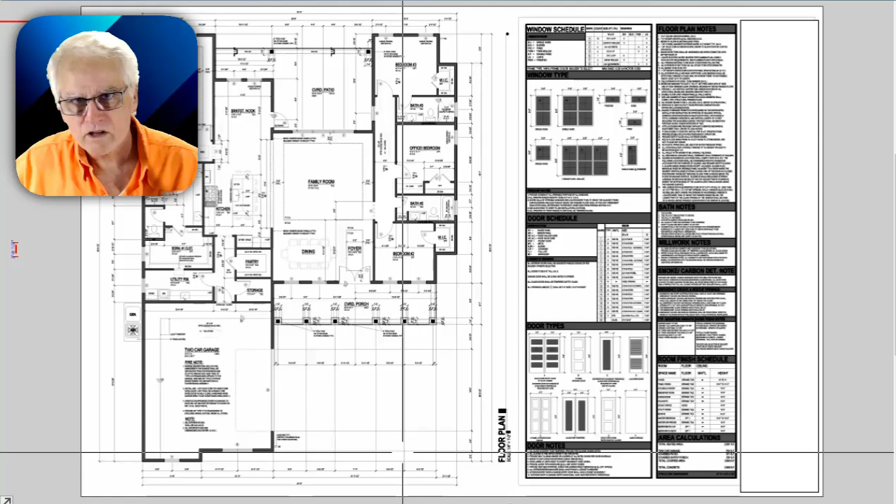So what we're looking at is a nice floor plan. It's got several bedrooms. It has all the components you would expect, a garage, a number of bathrooms, a porch, and that kind of thing. But let's take a look at the front so you can get a sense. It is a single-story home, some very specific elements. And you'll see a lot of notations drawn on this plan. Like I said, it's a graphical specification.

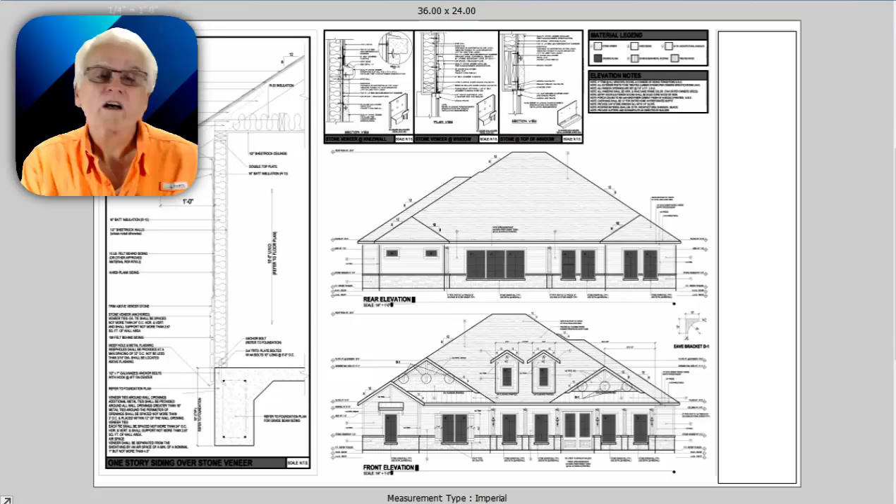It's almost like a builder, if they're really doing a great job, they have a written specification or scope of work or both that they're going to sign you up with under contract to build this home. Well, let's zoom in and I'll talk about some of the graphical specification elements. And as the buyer is expecting the builder to pick up on these details, the builder is actually responsible for building according to these details unless they have some documentation as to why they're not going to, usually done ahead of time.

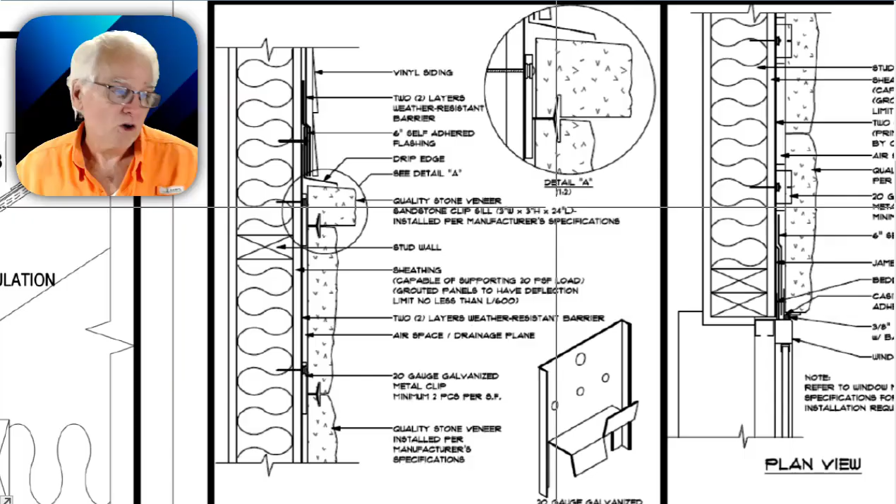So these are some of the architectural understandings that are being passed along through the plans to the builder, to the tradesmen that are working on this house, as well as to an inspector that is going to look at it. Now, bear in mind that inspectors are really focused on code more than they're focused on the structure. Now, the structural engineer, he's also focused on code, but he doesn't really concern himself with design because, after all, his is a profession, so is the architect.

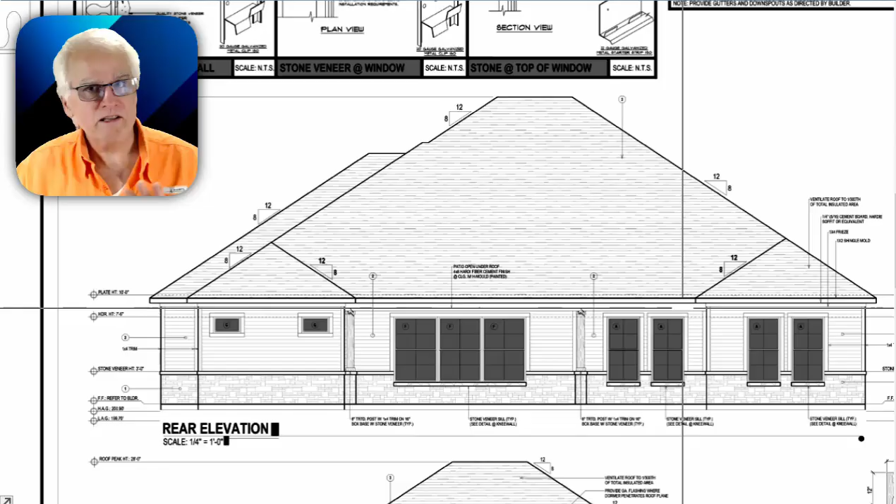A profession, and they don't really try to do each other's work. But what I do see from time to time is a plan that will say one thing and an engineer that will say another. So I've got an illustration for you on this very plan where that has happened.

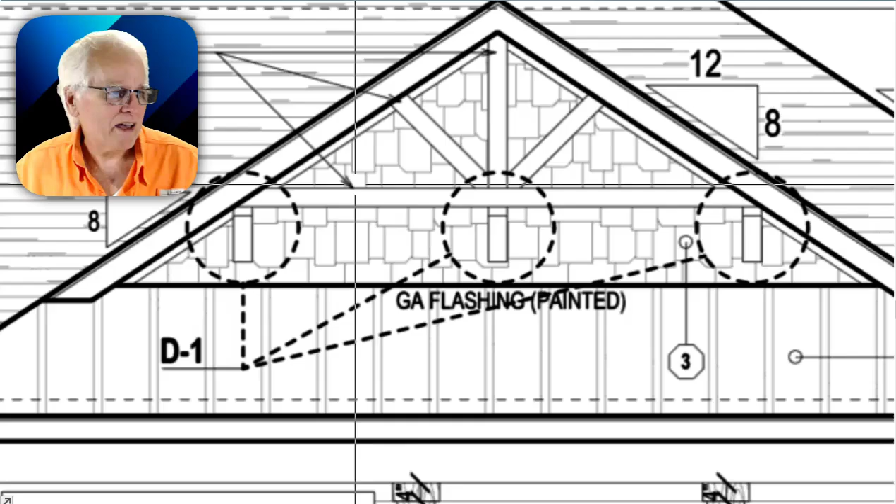Now, first let me show you some of the graphical elements that are being designed, but not by an engineer, but by the architect. That is, we see this gable here, and it's got some staggered shake shingle siding, and it's got a gable truss that's built on site. Once again, these are decorative items. They're just design items. But look at this design item.

This is called a typical wall section. It's not engineered. It's just a typical wall section. This is the architect telling the builder, if I were you, I'd build it like this. It may or may not be designed according to code.

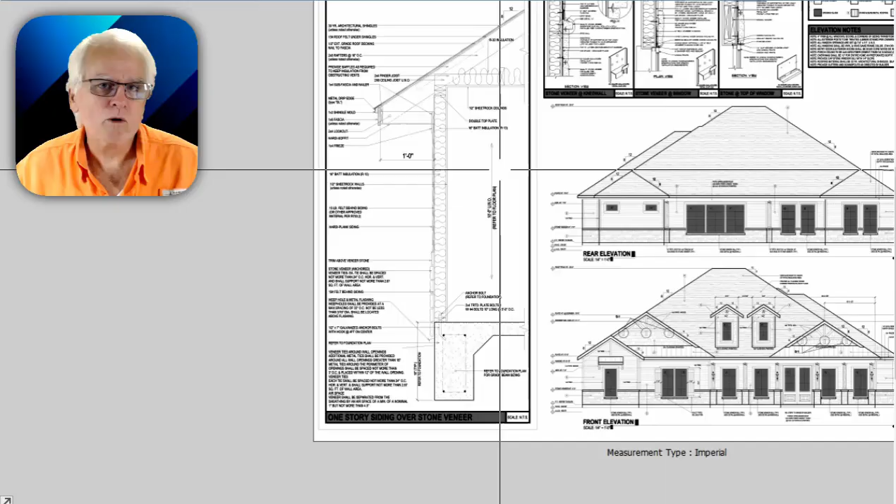This design might be required by a given municipality, especially if this has to be a firewall, like if a house is going to be right next to another house within 5 feet, typically. In some areas, it's 3 feet. But, where you have to have a firewall, and whether that's going to be like vented soffit.

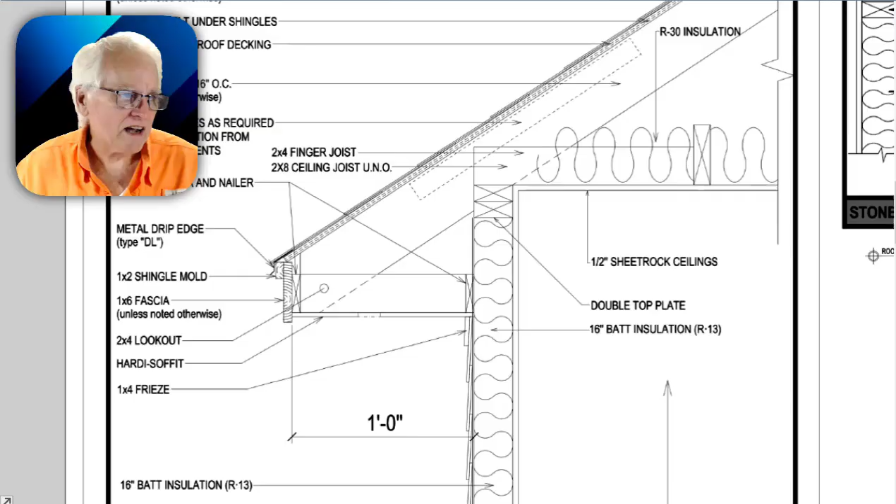In this case, they are actually showing we've got some rafters drawn in, we've got ceiling joists, these squiggly lines here, that indicates insulation. And this is the ceiling for the overhang called soffit. You see the hole there. That is venting for the soffit. There's a whole system to this where the air can go through the venting and ventilate through the roof, through ridge vents. But it's not engineered.

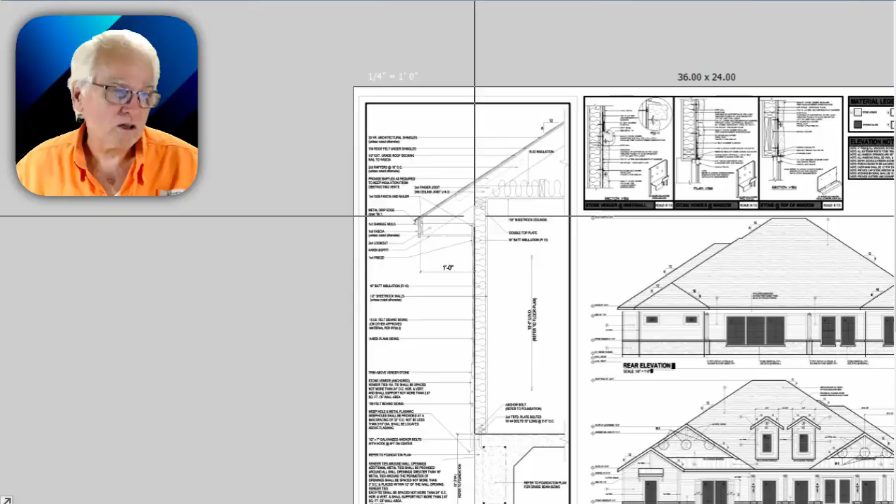It looks pretty. It looks like a wall, but as far as engineering is concerned, it's just a picture. But here the designer is saying you're going to have some half-inch sheetrock, some batt insulation, and so forth. But once again, it's not engineered. So how can I prove it's not engineered? Well, let's start at the foundation.

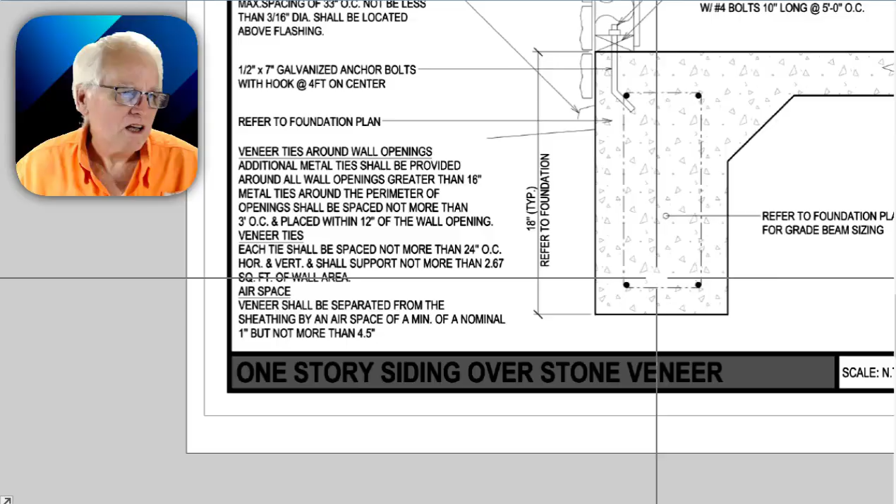This designer is telling somebody that, now this is the foundation beam. Now, the beams in our area with a monolithic slab are a component of the slab. In other areas of the world, you might see this as a footer, maybe a 24-inch wide by 12-inch deep footer with some rebar in it, with the slab then poured later on top of that. That's not how we do it in our area. This is called a monolithic slab.

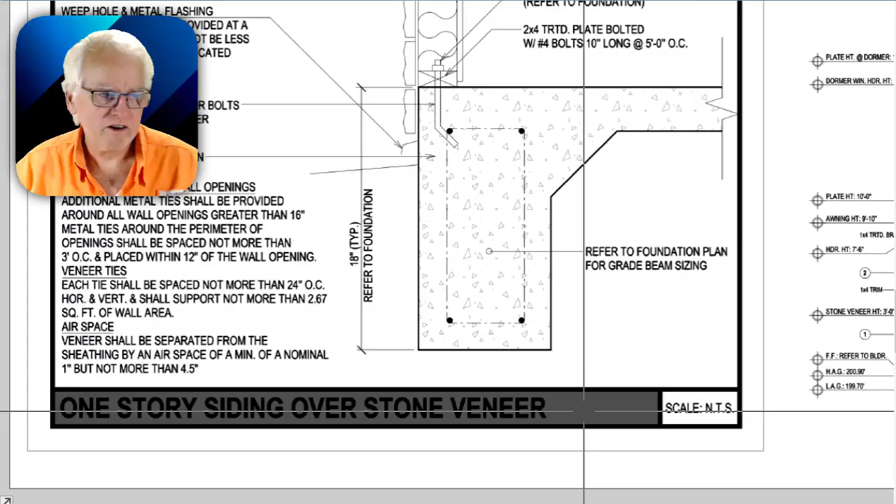In this design, there are these 4 dots here. Those represent rebars. These dashed lines between them indicate stirrups. They're going to turn these rebars into a cage, but they only show 4. I want you to key on that. And they also say that the depth of this beam is 18 inches typical. But what they don't give us is the width of this beam.

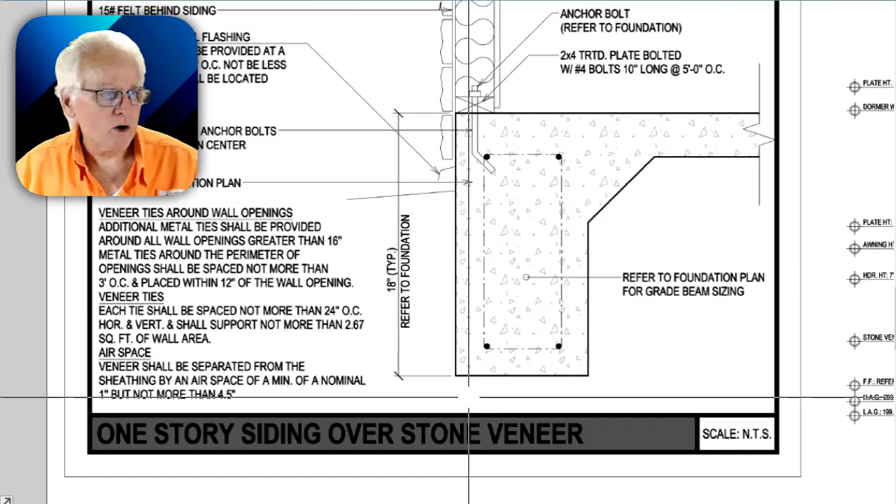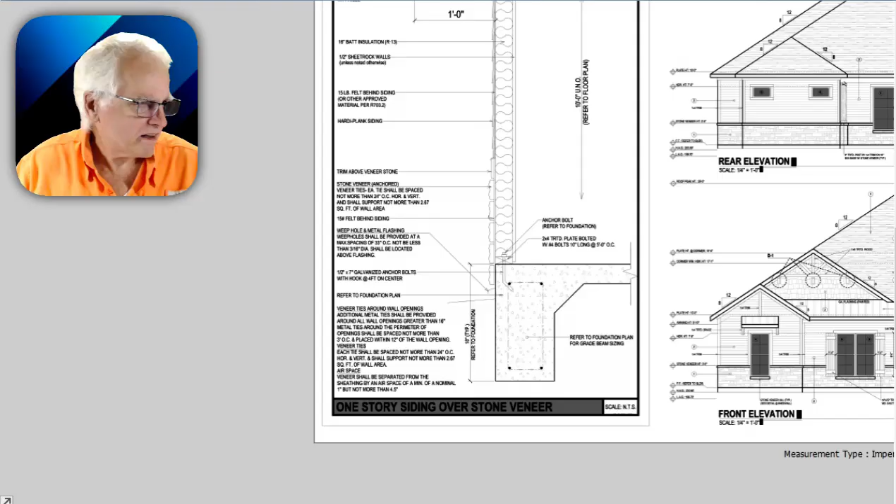So this will vary according to some things like something we call a soil test. It's called a geotechnical engineering survey, and it is a crew that comes out with a special truck that drills what we call cylinders, or about 8-inch holes, and they grab the dirt, usually 3 of them on a job site that's a regular lot, and they take those to a lab and they see what's in that soil. Then the engineer takes that data and they draw this. And this is your foundation.

So now what we've gone from is the structure. I'll go to the floor plan. Remember, that's the floor plan, but now we have the foundation. It mirrors the floor plan in a different way.

Now, when we're talking about beams, we're talking about the structural concrete in our case, the foundation elements that are trying to transfer the loads that originate at the ridge beam of the house, and they transfer from the ridge through the rafters to the walls, to the foundation, to the soil. So we're trying to transfer loads to the soil without disrupting the soil or displacing it, because if that were the case, then the foundation would fail. That would be a problem.

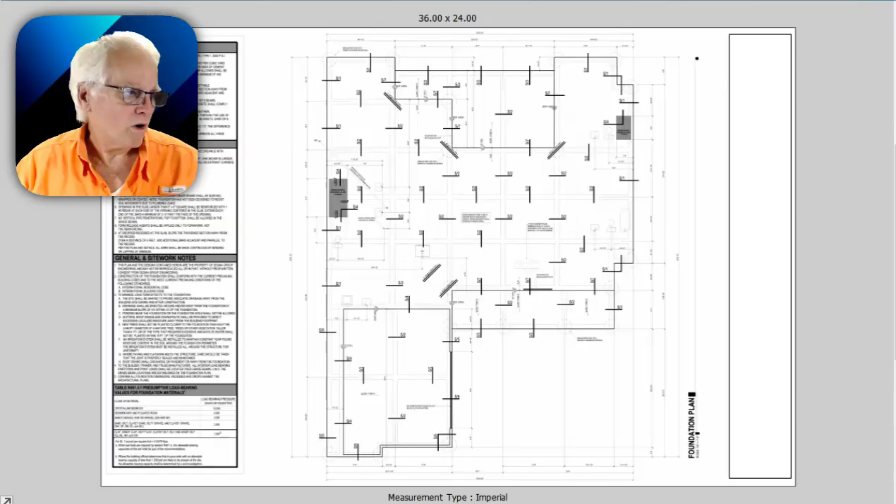So when I'm showing you this, there are some details I'm going to show you in a moment that will help you understand what's going to go where. For the moment, let's kind of look at some areas. This is the garage area. And you'll see some notations, S5, S4, S2, S6.

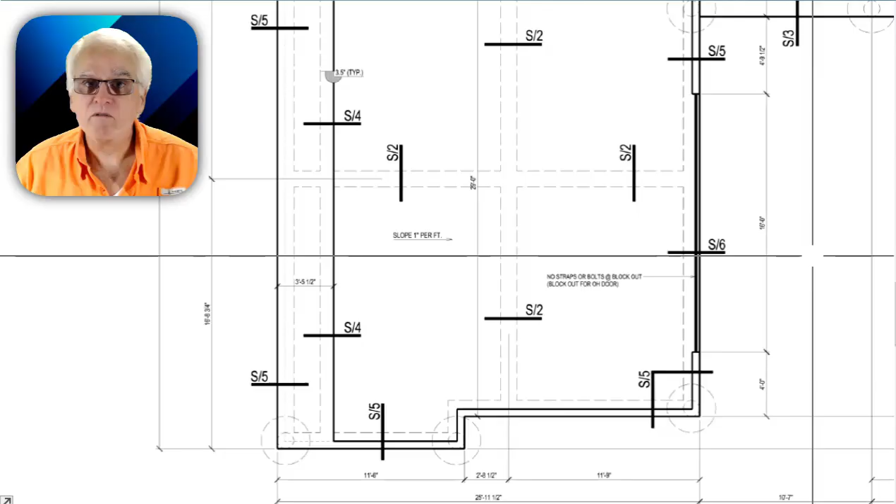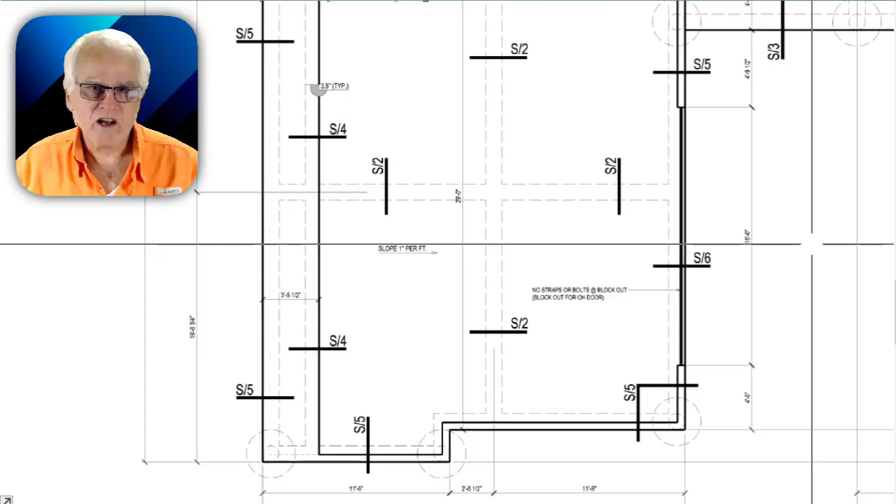Each of these designations is telling the builder and his tradespeople what type of beam to put here. I'm going to show you the picture of what it looks like, but basically it's the width, the depth of the concrete. It's how many rebar or what type of structural support it's going to have. This is a rebar slab, but we also could do a cable slab. We see production builders using something called tendons, also known as a cable slab. Totally different methodology, although the design would look very similar.

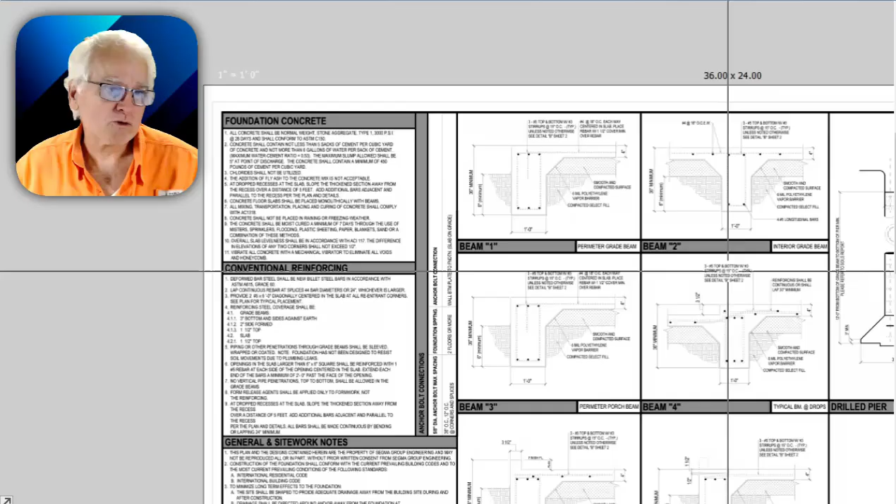So all of these S designations, they relate to these details. And so what we have is beam 1, this would be S1, this would be beam 2, or in our case S2. Some would say that this is structural sheet designation. I'm looking for the structural designation. So some people would look for the sheet name and then a number, like I might say S2/1. In this case, what we're looking at is what that same beam should look like.

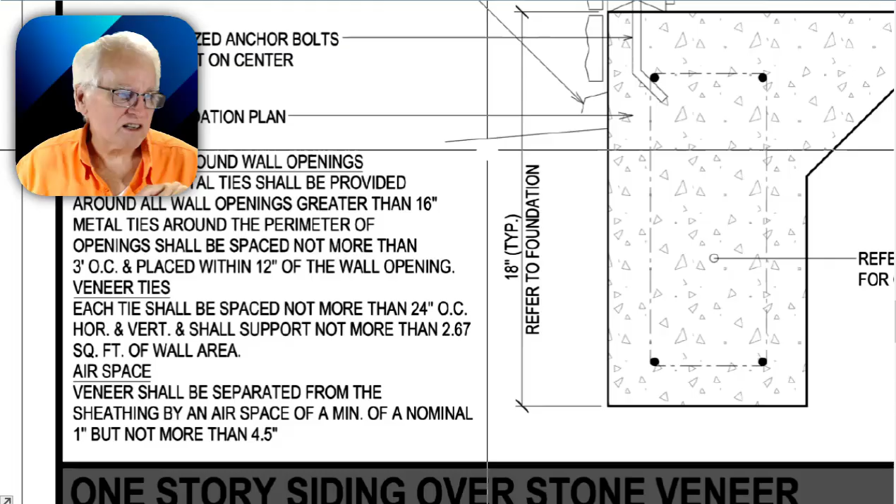Now, I'm going to take you back real quick and remind you that they said this beam could be 18 inches with 4 rebar. But when we go forward, we see that the engineer actually says, nah, you need 6 rebar. Oh, and by the way, I want my beams to be 36 inches deep, twice as deep as what the architect said. So this is a good reason not to trust the architect to be the engineer.

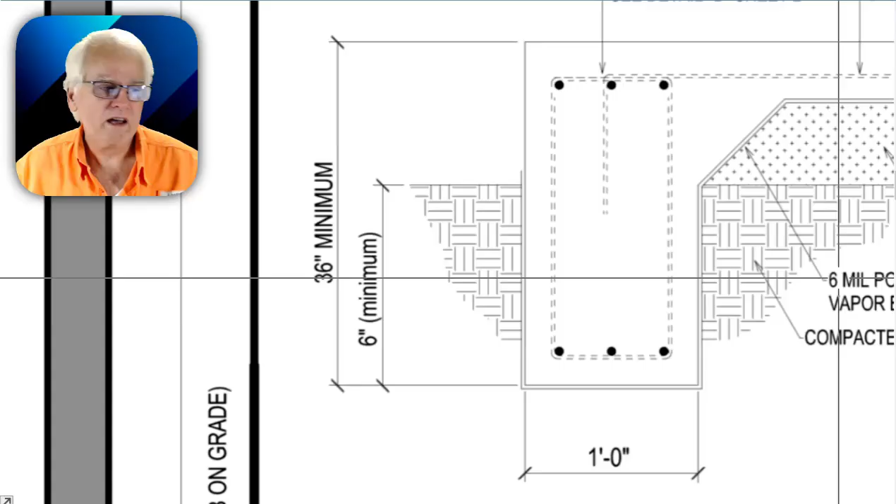Architects are experts at what they do. And I guarantee you this architectural plan that I'm using as the illustration is an excellent plan. I think the architect has taken great pains to draw the plan the way the buyer expects it to be built and in a way that would satisfy both the builder and the trade. But when it comes to the structural elements, what they've said is, no, we want very specific 36-inch tall beams, and we want them to be at least 1 foot wide. And I did say at least.

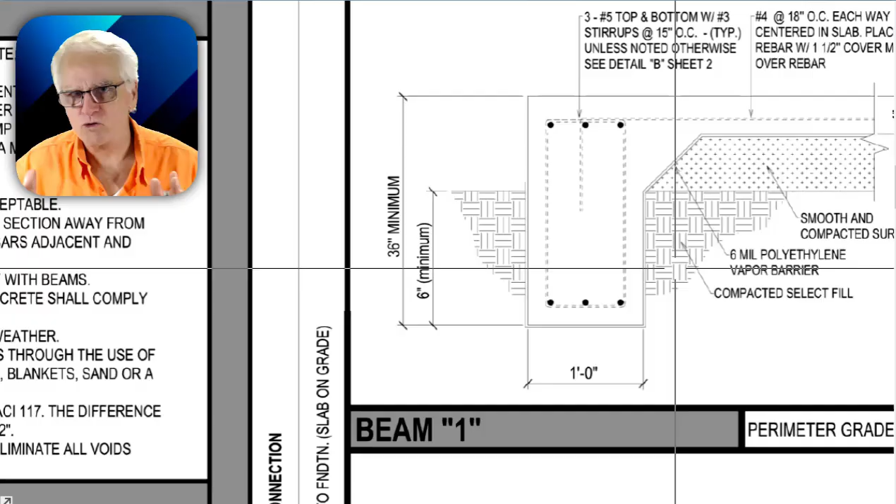A lot of times, now this is something, check with your engineer, but a lot of engineers, they don't mind if that beam's an inch deeper or an inch wider. They do not want it an inch too shallow or an inch too narrow. In this case, he also wants 6 rebar. And by the way, he wants stirrups that accommodate those rebars. And he's designated that we're going to support the main field of the foundation with number 4s.

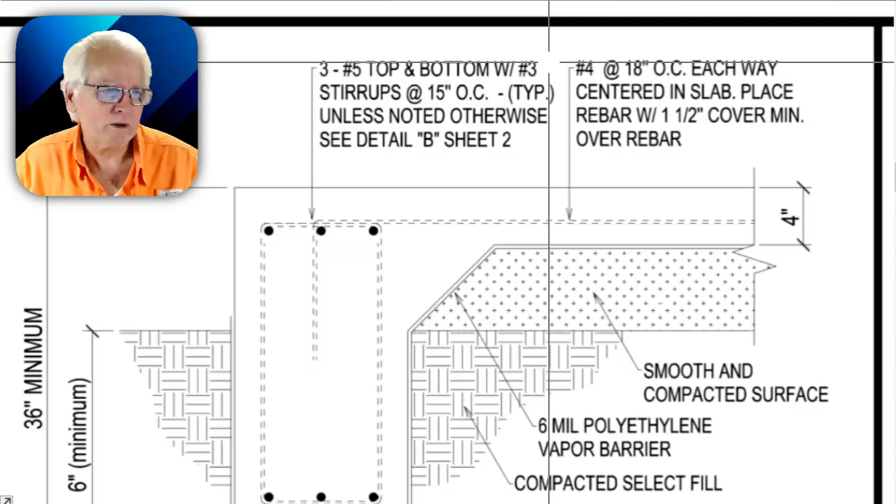Number 4 rebar happens to be 1/2 inch. I look at it as 4/8 rebar, but they're called number 4 rebar. And so these will be at 18-inch spacing. And they don't really show it here, but they'll actually be supported by something called plastic chairs to keep the rebar in the center of the concrete so that it does its job.

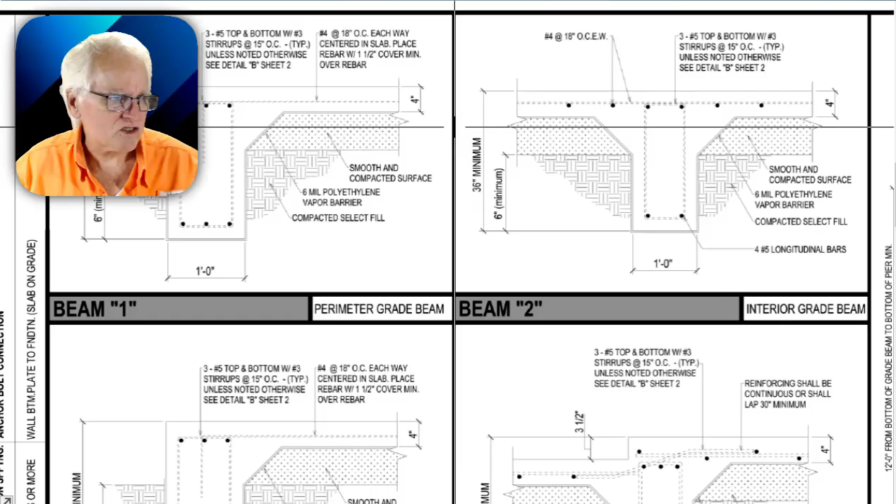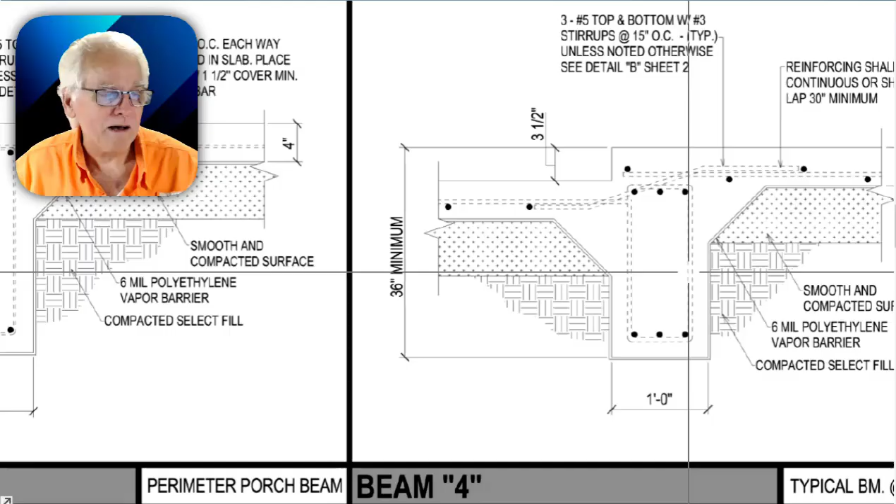So what you're going to see here is a lot of consistency, 36 and 1 foot. We go down to this beam, 36 inches, 1 foot. In fact, each of these beams is designed to be 36 inches from the top of the slab to the bottom of the beam. Now there's some neat details and nuances here, but I think already you can see why an engineer got hired for this job. And that is because the architect didn't really have a great handle on the requirements for the structure.

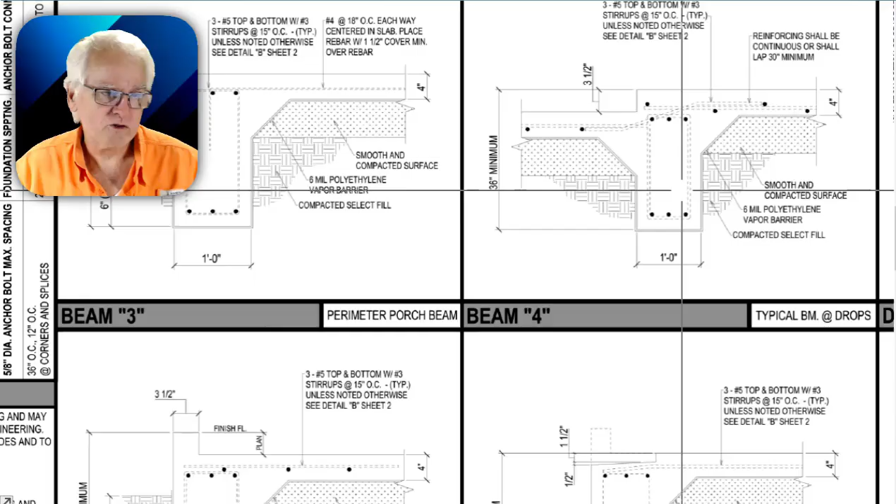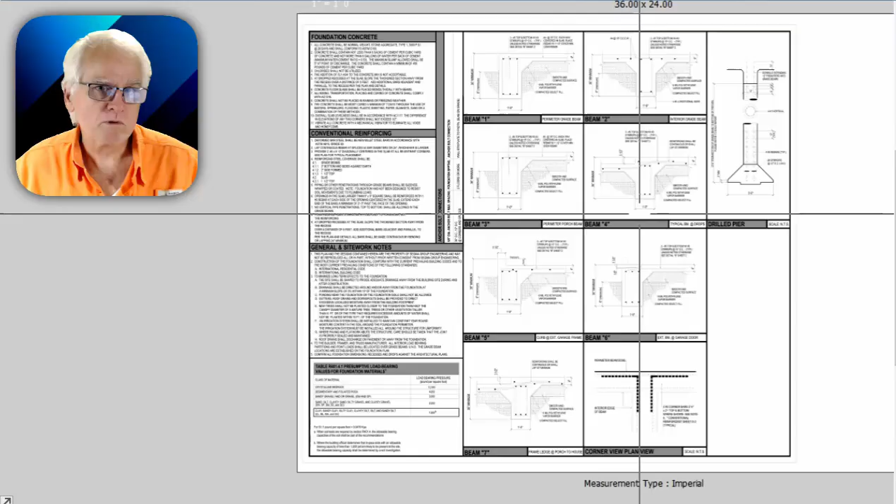So that's all well and good, but already we have committed to paying a structural engineer for doing this form. And basically you could hire a foundation engineer separately from the structural engineer. Same guy, different modality. In other words, the foundation engineer, he's only focused on that. He really understands the soil tests that came back, and he really understands what he's trying to accomplish through the structure. And by the way, it could very well be one and the same person.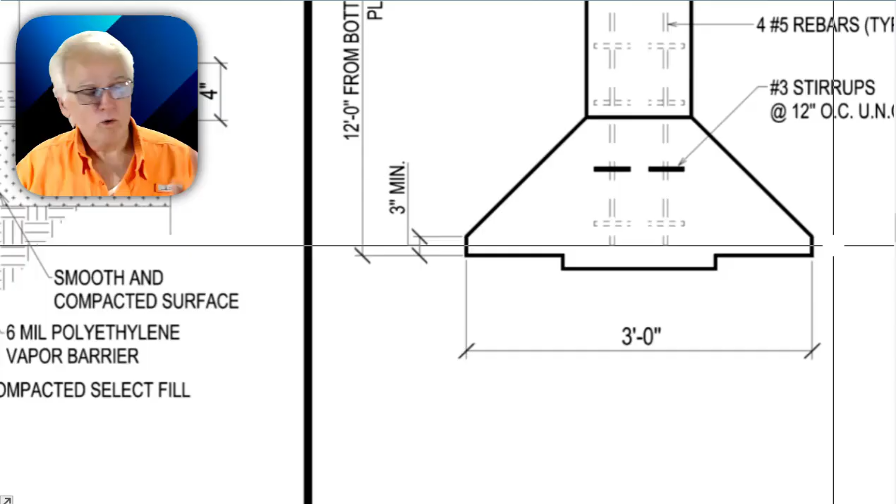And so this is all designed. It's not guesswork. Even though a professional builder that's built a few hundred houses would know, hey, this will work, especially for a single-story house. When we're talking about a 2-story house or a house that's not a square, maybe it's an L shape or a U shape or a bat wing type shape, the structural needs really get complicated, which is why we want to hire the professionals.

Let's talk about the plan. What I'm showing you here is a fly sheet version of the roof. And I guess maybe it's not fair to start at the roof.

I like to build a house from the ground up, but let's start at the roof. And I'm going to show you, we're transferring these loads from the roof all the way through the house. But what you're going to see here, it's a nice design on a roof. We call this a fly sheet view. And this is like you're flying over it, or maybe like if you were a fly, this is what you

would see looking down. And it's a great schematic view of the roof, but it doesn't tell us anything about the size of the rafters, how far apart they're spaced, how we're going to support the roof, and especially things like supporting the rafters mid-span with something called purlins. It doesn't talk about how we're going to support the ridge and the valleys and hips, because all of those are components, especially a valley is supporting rafters and the hips that are above them.

So there's just a lot to go into this that, yes, an experienced builder and even an experienced framer is going to know what to do. If you're building a home in the middle of the desert, there's no city around and nobody really cares what you're building, you can take your chances. Your family's going to live under this structure, and you don't want it to have a structural failure in some way that might injure them. Okay, it's a far-fetched thing, but it could happen.

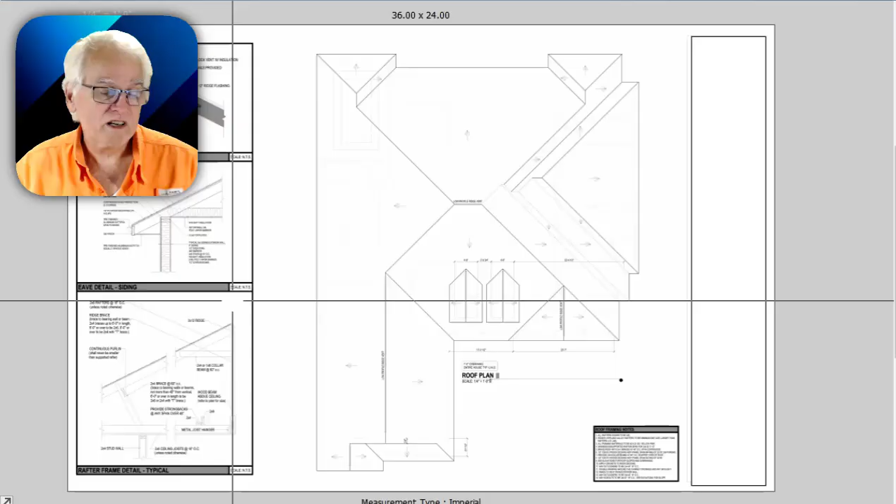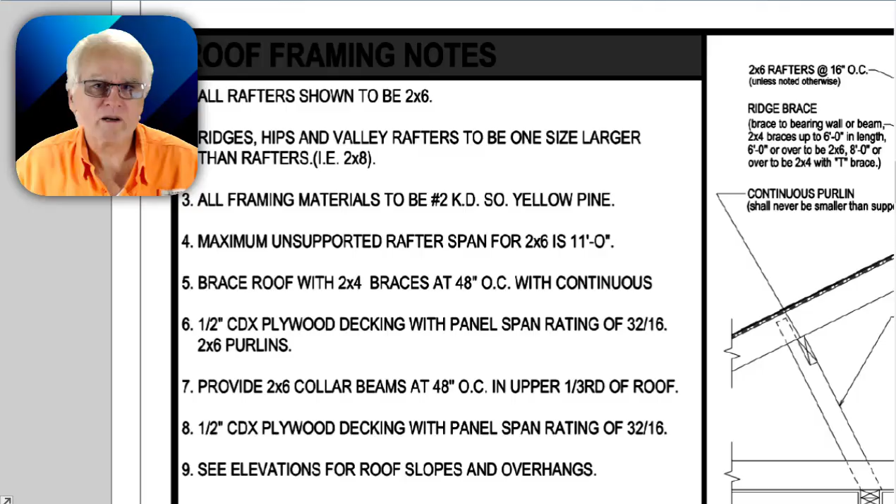This is why a builder, really a professional builder, they're going to pass this right back to you as the buyer. If you want them to hire an engineer, they're going to charge you for it. So in my opinion, this is one of those things that's just a need. So now let's see how the engineer looked at this very same roof. So what you're going to see here is he's drawn in every rafter. And if we zoom in here, he's given us a lot of notes about what we're going to build. He's saying all rafters are going to be 2x6s.

Now, I think I said it before, I'm a material estimator, and I do lumber takeoff estimates. And one of the first things I look at is the engineering. Does the plan have engineering, or do we have to have some conversations so I can shed liability back to the builder, because I'm not an engineer, and he can give me his idea of how he's going to frame this. In this case, everybody's protected.

We have an engineer. He is charging you a lot of money, and he has liability insurance in case the builder has to build this the way the engineer says. But if there's a failure, then it's on the engineer to make it right. And builders know it, and the engineer knows it. That's why they charge what they do.

All rafters are 2x6. Ridges, hips, and valleys are going to be 2x8s minimum. And by the way, word to the wise, when you exceed 9 and 12 on roof pitch, usually you go twice as large. A 2x6 rafter would then require a 2x10 hip, ridge, and valley. That's often checked by your inspector, although I do see engineers that miss this detail.

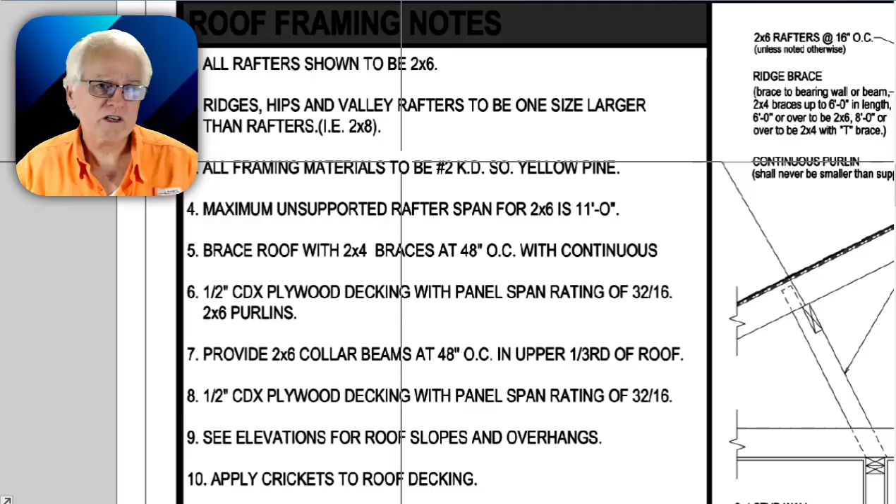So move on. You have some details here where the engineer is stating for you, the buyer, for the builder, but really for the inspector that's going to review this plan once the house is built. After the lumber's already been used, he's going to look at this plan and say, did the framer build it this way? And if he didn't, by the way, the onus is on the framer, the builder, and everybody but

the engineer. Because I have literally had structural engineers have to write letters saying that, yes, it wasn't done according to my engineering, but yet telling the inspector that, yes, it will meet code. That is called an engineer's letter. It generally is accepted. Check with your municipality or county to make sure they would accept an engineer's letter.

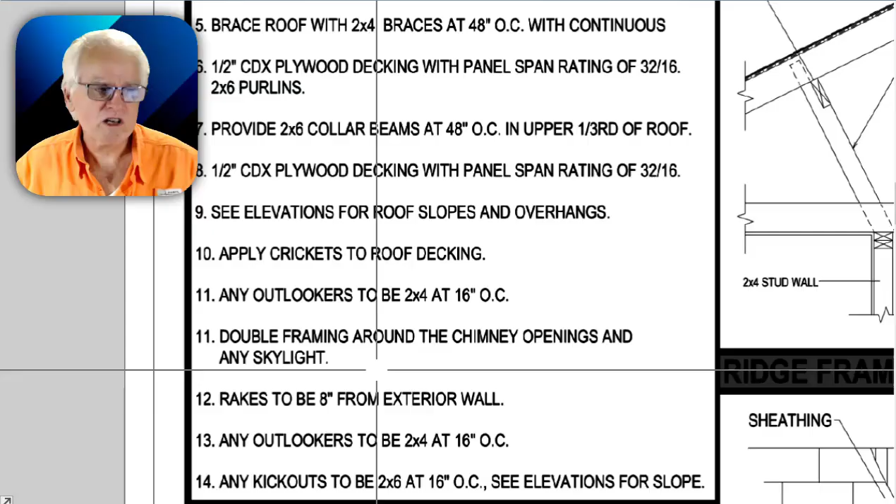But if you don't build according to the engineering, that's what you're going to have to do. Or if the engineering was flawed in some way, maybe a job site requirement, and this does happen, where the builder gets on site, realizes something has to be framed differently, gets with the engineer. The engineer doesn't redraw the plan. He writes a letter and explains to the inspector what's going on.

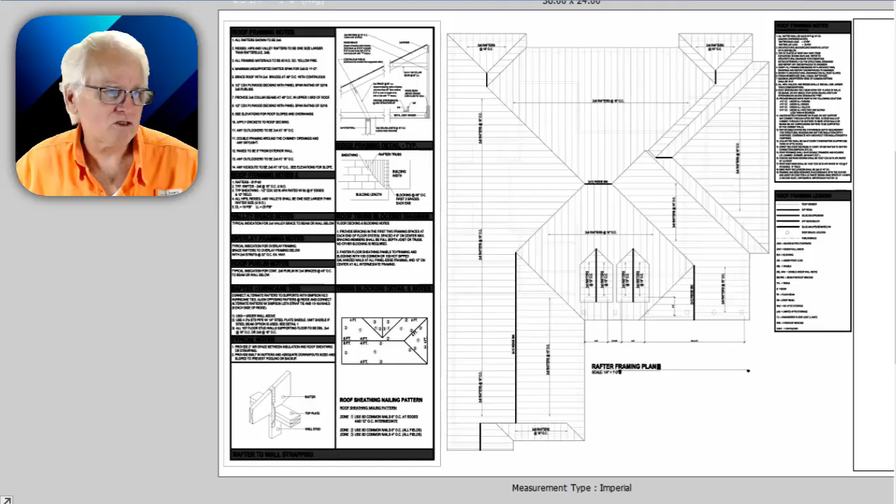Usually that's accepted because an engineer has the capacity to trump code if there's a logical reason to do so. They would never do so in such a way that they took on undue liability. So that's just kind of how it works. At least in our area, your mileage may vary.

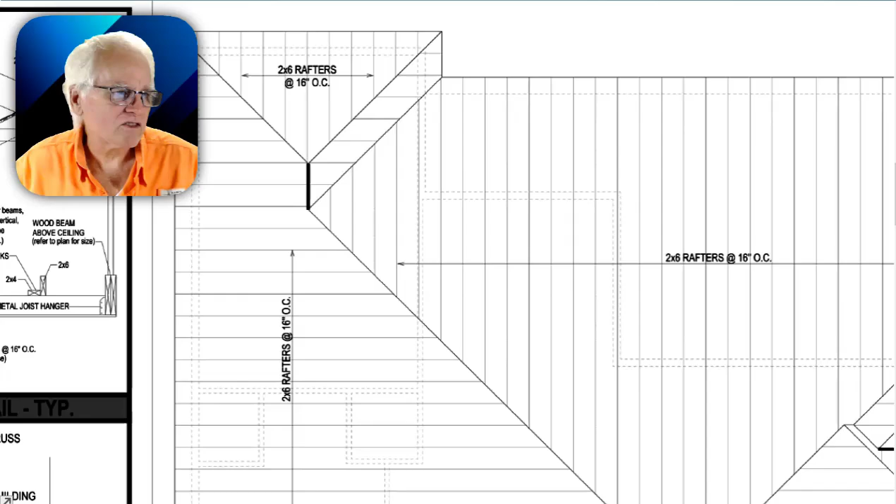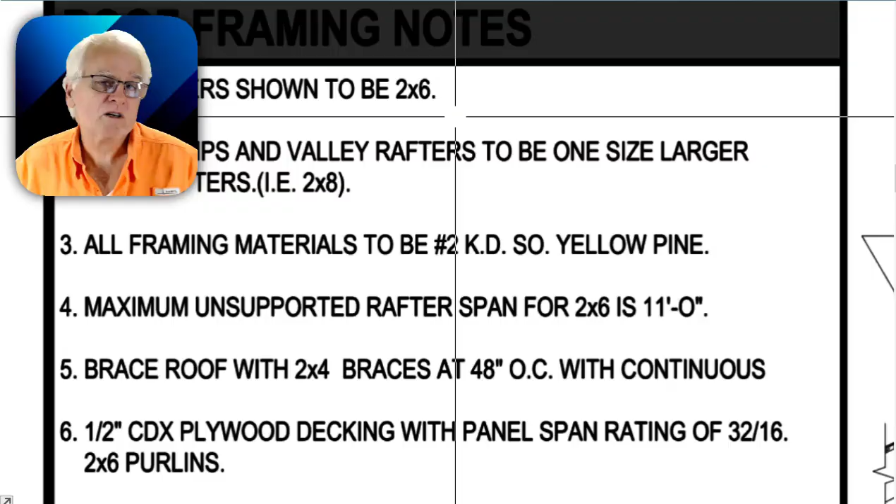So what we're looking at now is some details that really give the framer a little bit more help. Now, what I don't see on this plan is where the purlin supports are. What I know as an estimator is if the rafters are going to be 2x6, then our purlins need to be 10 feet inside of plate. The unsupported span usually can be no more than 10 feet. And what I'll do as an estimator, I'll just go ahead and throw in purlins for every 10 feet.

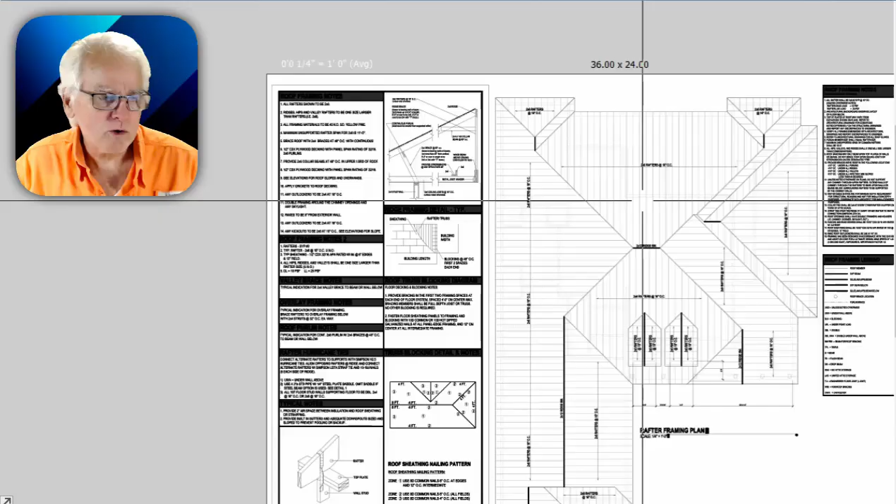If I saw these were going to be 2x8s, I might make different decisions. If you're building in an area with snow load, for example, in Minnesota, maybe your rafters are going to be called out as 2x10s. And I see this type of thing a lot, which is what I do as an estimator. I go through the plans, through the engineering, have conversations with the builder to make sure that I'm not just throwing Texas specs at Minnesota. I really want to make sure that Minnesota builder gets exactly what he's looking for because they do build differently there. I've discovered that through my experience.

But anyway, this engineering looks pretty simple, but it is worth paying the engineer, if nothing else, so he can take on the liability. And if I'm the builder, that's what I'm going to want. So now let's look at, we're starting at the top. We're putting a load on the next thing we're looking at, which is the ceiling joists.

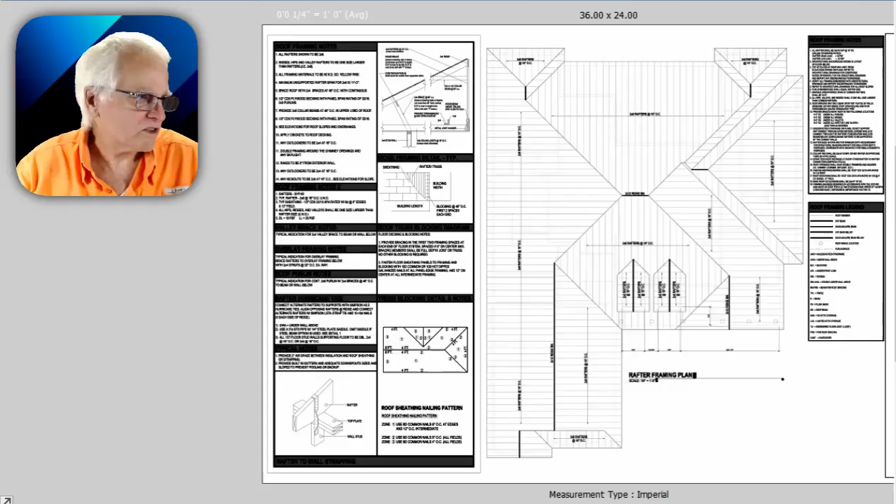Once again, we have a lot of details done here. Now, you can clearly see on the right side of this, we have the engineering. On the left side, we've got the details. Once again, this is where I start. And this legend is going to tell you how to interpret the plans, the little codes that he puts in. These are pretty much industry standard. No matter who the engineer is, this is what I'm going to see.

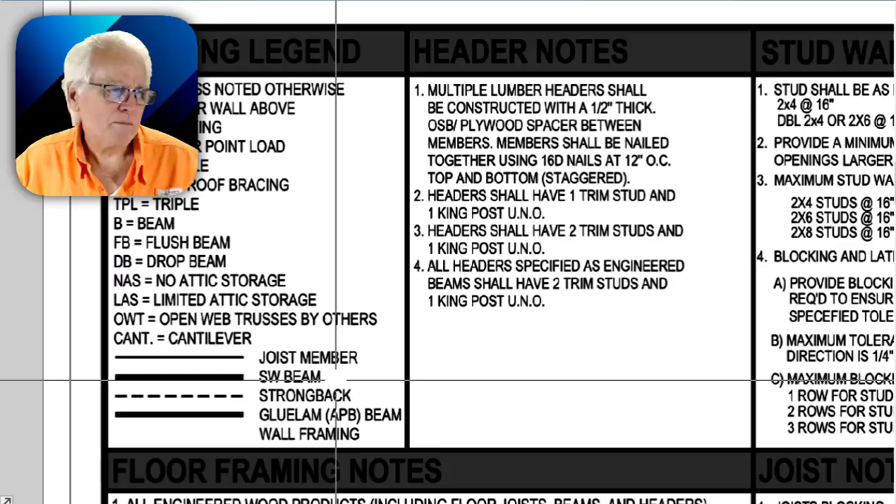We've got joist designated differently than SW beam or strong back or glulam, APB, and that stands for Anthony Power Beam. That is a brand of glulam, and wall framing. Generally, if I saw SW beam, I might interpret that as structural beam, or it could be a shear wall beam. And when I get into the plan, I'll figure that out.

So we have header notes because on a single-story house, we're transferring the load just from a roof. But if this were a 2-story house or even a 3-story house, we'd be using 2x12 headers most likely, or maybe even engineered beams like more Anthony Power Beams cut down and used as headers because we're trying to transfer an even heavier load all the way down to the soil.

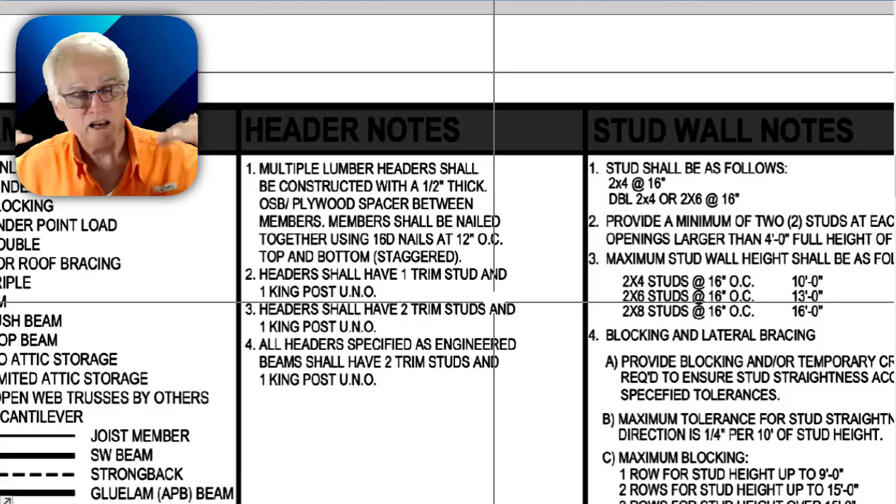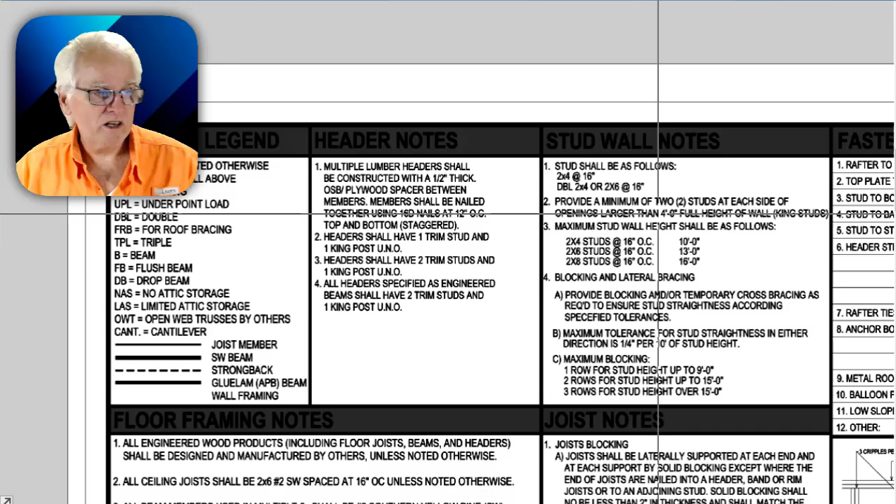So once again, the engineer has helped us a lot. And if I'm the builder on this, I've got a lot of security by reading this. So as long as we frame the house by these notes, I feel very safe that when the inspector shows up, he's going to pass this house with flying colors. And if not, we're going to have a conversation with the engineer.

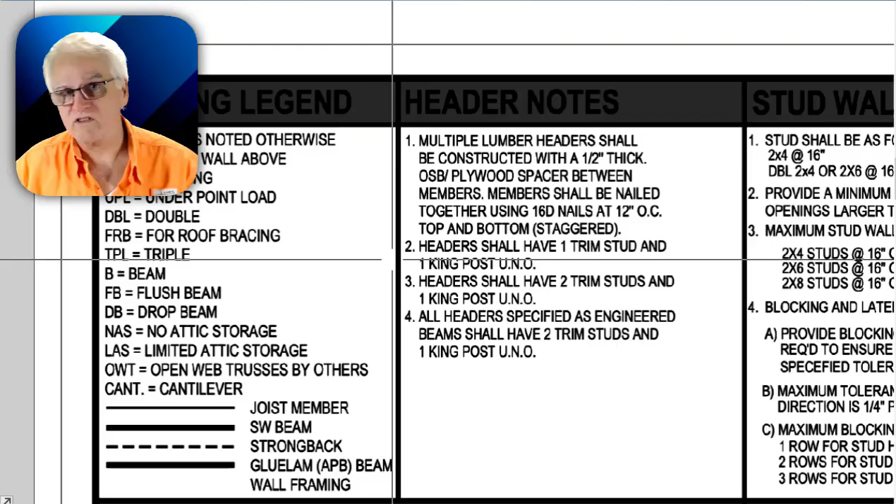And I've even had it be where the engineer has to come on site and explain things to the structural inspector. So these are things that need to be considered, and this is one of many reasons why I'd recommend you have structural engineering performed for your house.

But when we look at the house, not everything is in the details. The plans and the engineering are both graphical specifications for the expectation of how this house is to be built. I could write a notebook worth of instructions, starting from the foundation and working all the way through completion on the home.

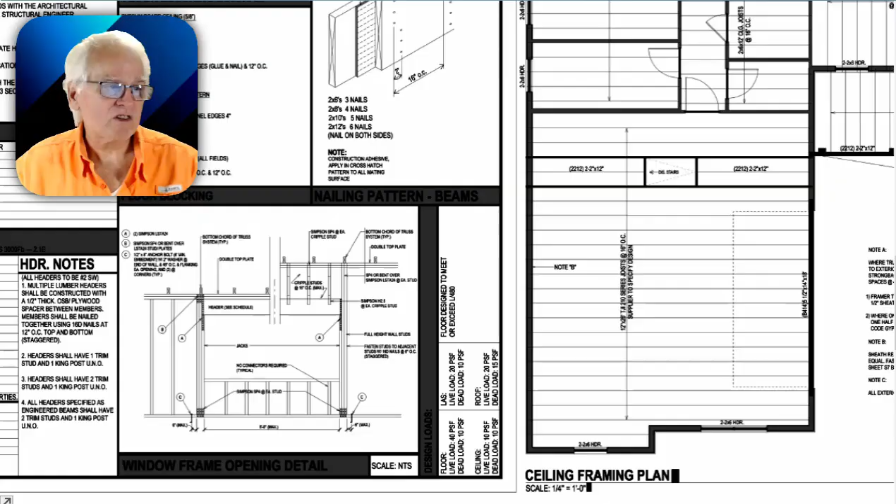But sometimes it's more efficient to draw the picture, and as we saw with the elevations and even the floor plan, the architect can very well graphically show something a lot quicker than writing it down. In this case, our engineer, we have some standard notes and details, but now what we're going to see is, like, this is the garage.

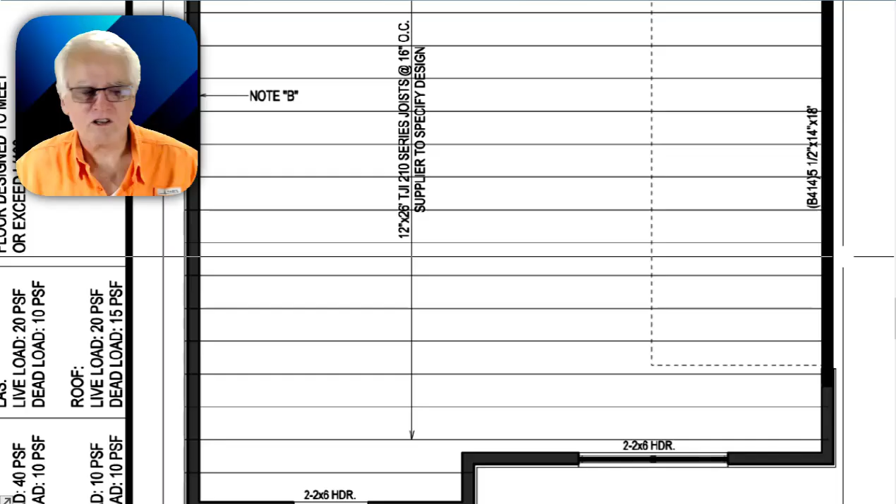He's telling us specifically how he's going to frame this garage, and I can tell you why he's doing this particular thing, because these are some very long joists. Typically in our area we use yellow pine, number 2 yellow pine, 2x12s. If these were 2x12 ceiling joists, they would only be able to go safely at 16-inch on center, about 22 feet. If you're going to have a loading of storage above, you might go 12-inch on center and 24 feet long.

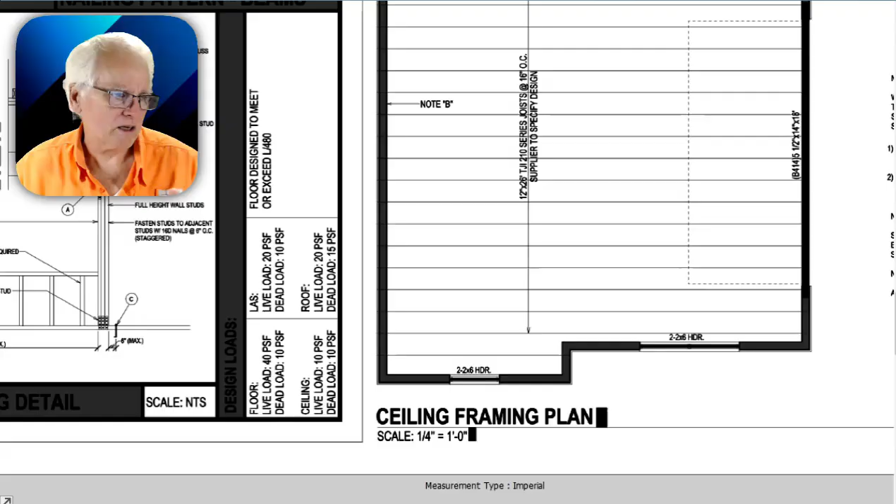And you can get 2x12s longer than that, but the cost is terrible. They just get very expensive at that length. In this case, the builder or the engineer said, we're going to go with 12-inch tall, 26-foot long TJIs. That's truss joists, or I-joists is what they might also be called. They are a type of engineered wood product, EWP. And they have headers, by the way, designated double 2x6 headers.

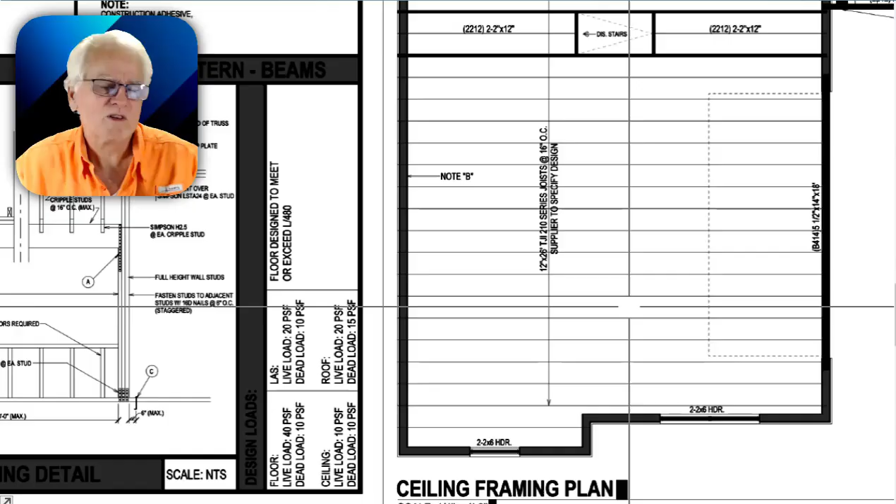Once again, this is good engineering, and he's giving us good details. Sometimes engineers, because they all use a different approach, give us a code system where they don't really tell us their TJIs. They might put I-28s, and you've got to go look up what I-28 is. So that's annoying. In this case, he's really done the builder a good service because he's literally telling you what's going to go where. Let's look at the front porch here.

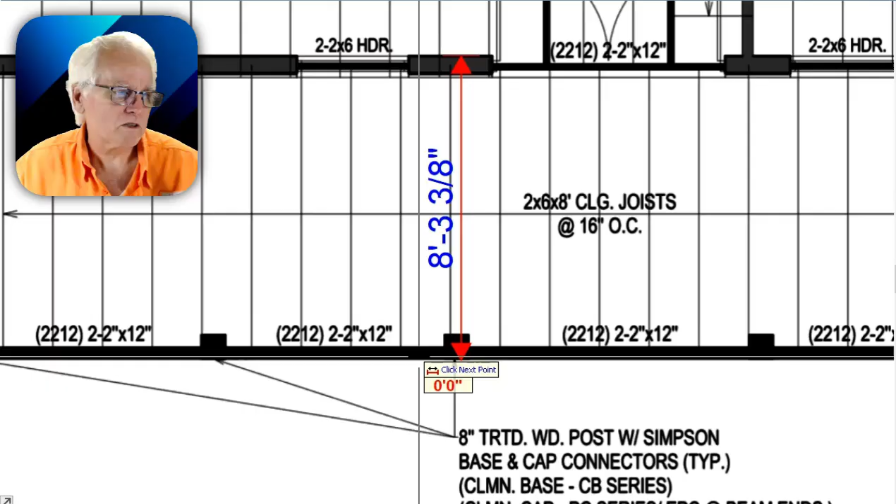2x6 by 8-foot long ceiling joist. Well, as an estimator, I'm going to look at this. I'm actually still going to measure them, because I'm kind of incredulous; engineers are not estimators. So look what will happen if I give them 8-foot members. They're probably not going to have enough, because this beam is going to go to the outside of this post you see, and then I'm going to run it all the way to the other side of my wall. You can see the way they've drawn these, as if they only have to go halfway on top of the top plate.

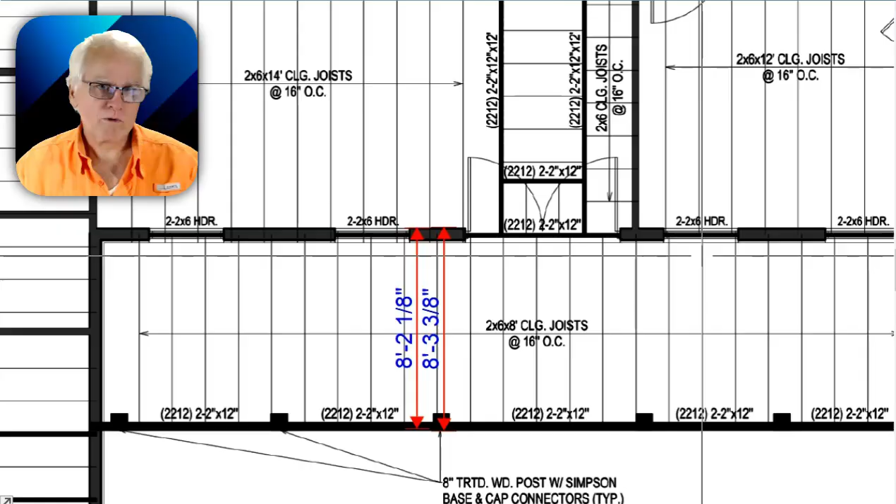Well, which is right and which is wrong? And I'm going to say they're both right. Code allows you, if I have a wall, to butt 2 joists right on top of that wall. And so if this were a 5.5-inch wall, I would expect 2 3/4 both sides, right? And that would pass code, but the framer's not going to frame it that way. Look what they did. He drew these as offset. And what I know as an estimator, having talked to thousands of builders in my life, they're going to offset them this way, right?

And so what I do, he says they're 8-footers, I'm going to give them 10s. But that's my prerogative, just like it's the engineer's prerogative to supersede the plans. Now, what I might do is pick up the phone and tell the builder, but you know what? A lot of builders don't want the details. They just want the lumber to show up and be enough. And so in my estimate, I'm going to put a note that says I gave you 10s instead of 8s. That's not an uncommon thing.

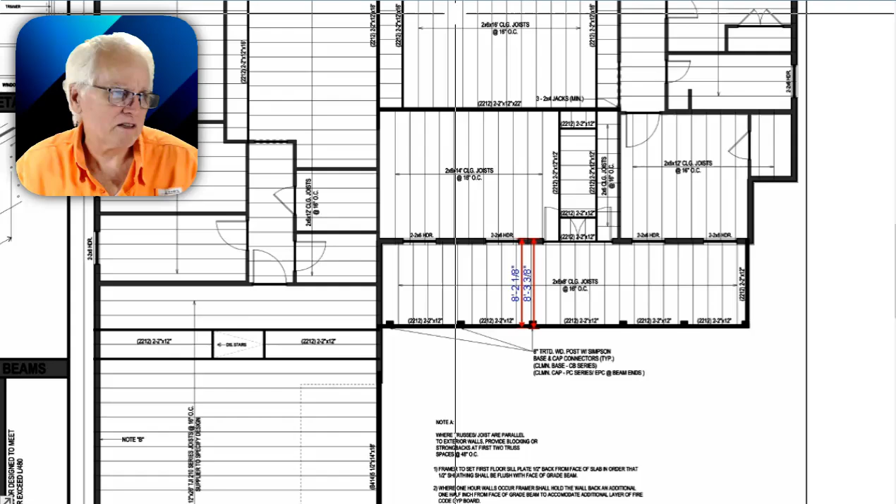So what we're doing here is like this one. This engineer kind of did 2 things. He said this beam is a 2-2-1-2 beam, that is to be interpreted as a double 2x12, or 2-inch by 12-inch beam. Now, by the way, for the newbies in the crowd, a 2-inch by 12-inch beam is a non-starter. There's no such thing. That is telling us it's a 2x12, and it's the nominal dimension.

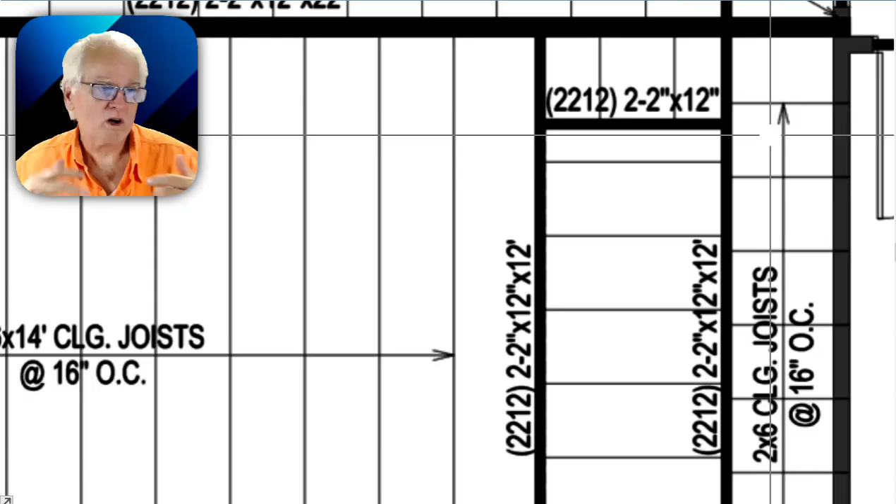A 2x12 is really 1.5 by 11.5, and once again, depending on the mill, your mileage may vary, at least as far as the width of the board is concerned. I've seen a 2x12 24 that comes out 11.25, and a 2x12 8 that comes out 11.75. So take that. But what this engineer has done is an excellent job of telling the builder the safe way to build this house.

And considering we are in such a litigious society these days, people want to sue for the silliest things. In this case, if the builder builds according to this engineering, he should feel safe that if he does get sued, he may be named, but he's going to transfer that liability down to the engineer.

And if he has an engineer's inspection, which I think is far better than a city inspection, or even a code compliance inspection, which some do all 3, because it protects the builder. The more inspections the builder does, the safer the builder can feel when it comes to that type of thing.

And if you're the consumer, if you're the person paying the bills, this is what I want you to remember. You don't want to end up in court, not ever. You don't even want to say the word lawsuit anytime during construction. It changes the atmosphere.

What I would want you to remember is that everybody from your designer or architect to the engineer, to the builder, to the estimator in my case, it's our hope and our dream to get you in that house, that you enjoy that house, that you get the best house possible, because we know that you're paying the bills. And at the end of the day, there is no cheap way to build a house without building it cheap. So the biggest question to you is, is it worth it?

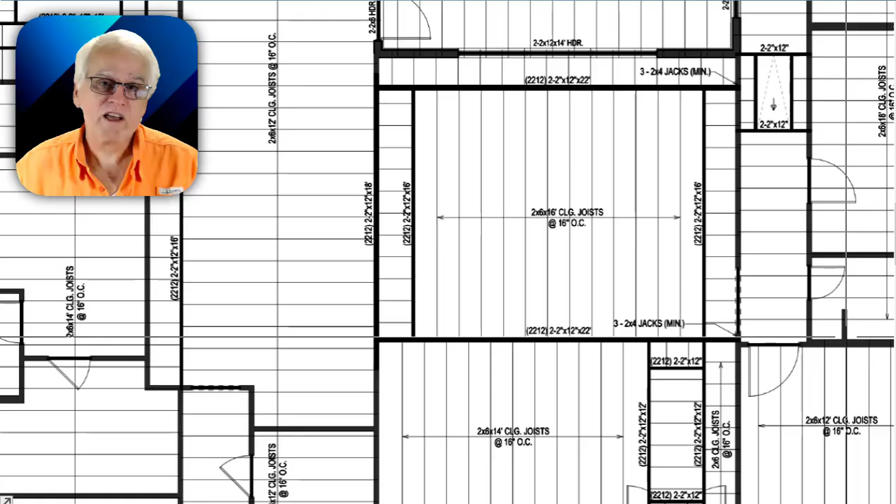But as long as you know that, I'm okay giving you my best opinion. But at the end of the day, the best opinion you can get on code compliance, I think, is going to be your engineer. So I hope that has helped you understand the nature of engineering as a component of all of the construction documents that you really need. And if you're going to build today, it's not as easy as it might have been even 20 years ago.

We have to consider things like windstorm, if you're in a hurricane-prone area such as Southeast Texas. If you're building in the mountains, you might have to think about seismic. Certainly if you're in California, that's an issue. If you're building in LA, they're going to be very concerned about fire in arid areas of our country. So certainly before you get into this, you need the best experts on your team as you can. I hope I've done a good job of encouraging you just to pay the price, do it right. And I think if you put the right people on your team, you're going to have a great house.